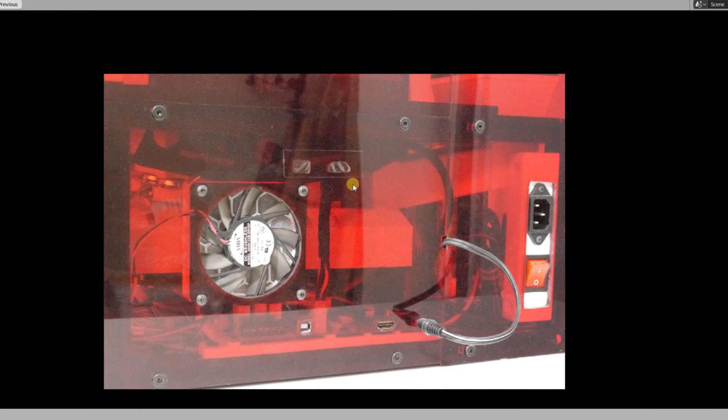It's been a while since we finished part 4, but let's get right into this and not take too long. This part covers the acrylic case, the fans, filter boxes, and ducting for the fans. Nothing too complicated at this point.

Your printer is pretty much already built, so all we've got to do is get the ducting assembled, the fans hooked up and mounted to the correct places on the case, and the case mounted on the outside of the frame. Then you're pretty much done and can print from there.

Looking forward to part 6 where we'll actually be doing the printing. We'll show you the actual printing process in a time lapse, how to use the software I'm using, all that stuff. That'll be the most exciting part, but let's jump right into this.

This is a view of the right side of the printer. I don't have any drawing files or CAD files to show exactly where to place the fans. For the diameter, you'll just measure from the fan itself. I don't remember what it is in millimeters, but these are 80 millimeter fans. The actual placement here is not super important.

Down here I have all the electronics and chipboard on the bottom. The actual position of this fan and the filter can be moved around a little bit as long as you don't hit the electronics. You can go up, forward, or back, so the placement is up to you.

The one thing you want to make sure of, when drilling the holes for these Allen bolts for every part of the case, is to do all the drilling and cutting you can with the paper still on. When you get the acrylic it has paper on it, so make sure you drill these holes and everything with the paper still attached, because as soon as you take the paper off you start scratching up the acrylic.

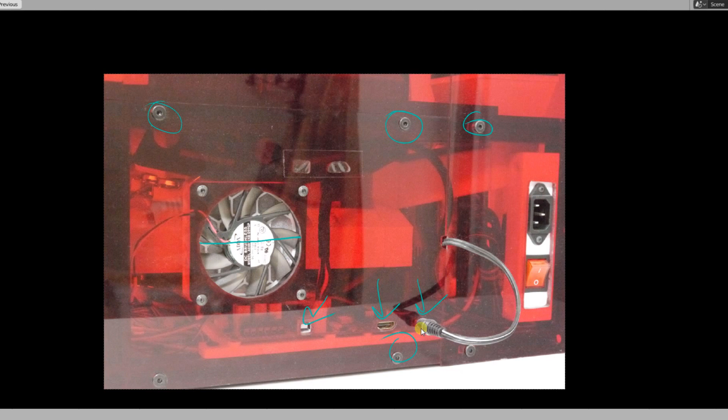Obviously these guys here where the plugs are, I had to do after removing the paper because you need to be able to see where they are. I put it on the side of the printer and used a Sharpie to mark exactly where these plugs were going to be, so I could get the Dremel out and put them in the right spot. But everything else I did with the paper on, so you don't damage the acrylic.

The other note for these bolt holes is to step them up: use a pilot drill bit, an intermediate bit, and then your last bit slightly oversized. If you drill exactly to the 5mm equivalent, there won't be enough play to get this to mount on the printer. There needs to be a little play between the hole and the bolt so you can get these things to mount.

Give yourself a little room and use a couple of drill bits to get up to the size you need, because if you start with your end diameter right away, you're going to end up chipping the acrylic and cracking it, and you'll have to buy another piece. So that's the basics right there.

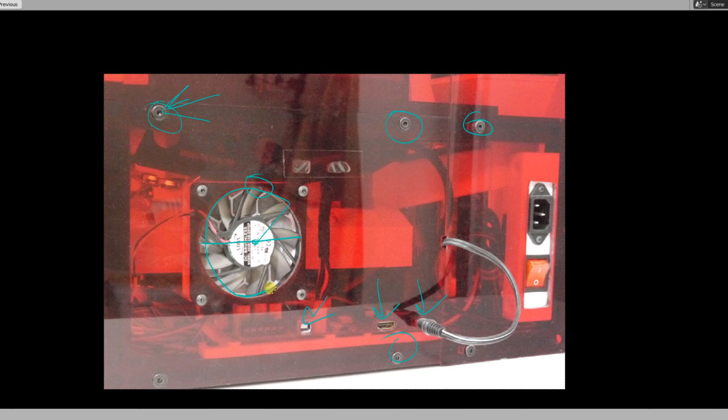On Thingiverse you can see there's a little dip where I cut this out. There's a circle guide attachment you can print for a Dremel that lets you put a center point here, and as you cut it acts like a compass, cutting a perfect circle. You might want to use that for a more perfect circle cut out. Or if you have access to a CNC, you could do all of this with a CNC machine. If you want to contribute CNC files, I'd be glad to upload them to the Thingiverse group page.

So let's go on here to the next photo.

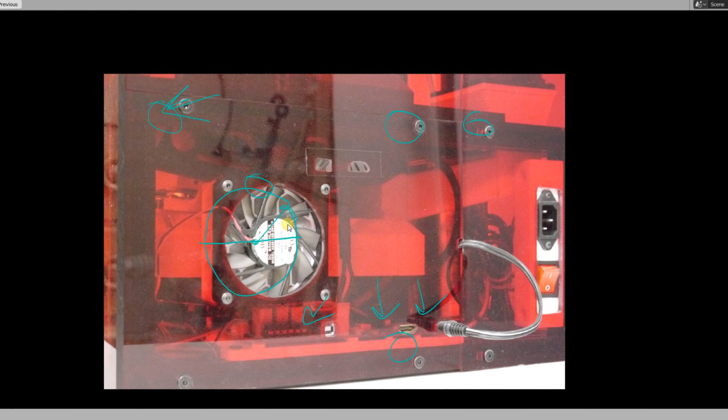This is kind of a top-down view looking in the side. This is just a close-up of the plugs. You can see I cut them pretty close.

In the case where a plug like this has sharp corners, I just used a miniature file set to get these squared up, so you don't have to do anything too fancy. Just get it as close as you can and then file out the corners into the shape you need with a hand file. There's really not much to it.

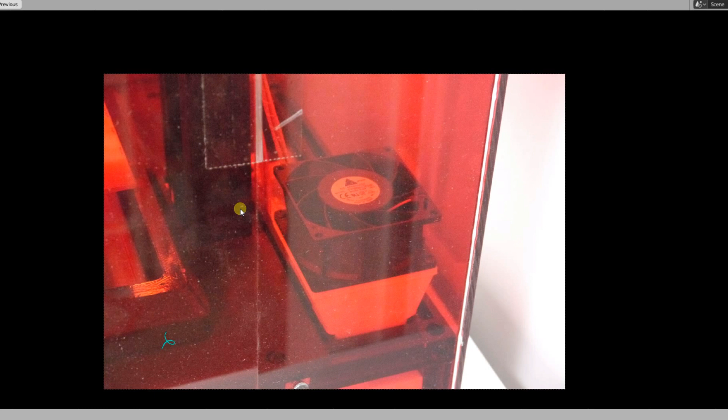On the back here you can see where we attached the back piece of acrylic. I used a product called Fuse It. It's basically like a glue and a sealer, so that way I don't get fumes escaping out of the back here, and it makes the whole printer a little more stable because the back actually holds these sides in place.

The sides are bolted to the frame, but there's no frame at the top of the printer, so up here out of the view there's nothing holding this except the back. So this needs to be glued to the back semi-permanently in order for the case to have some rigidity.

Let's just get here to the next photo that's important at the moment. This is the top of the printer over here. This is the bottom, so we're looking at it sideways. But I just want to show you guys for the seams, the doors and whatnot.

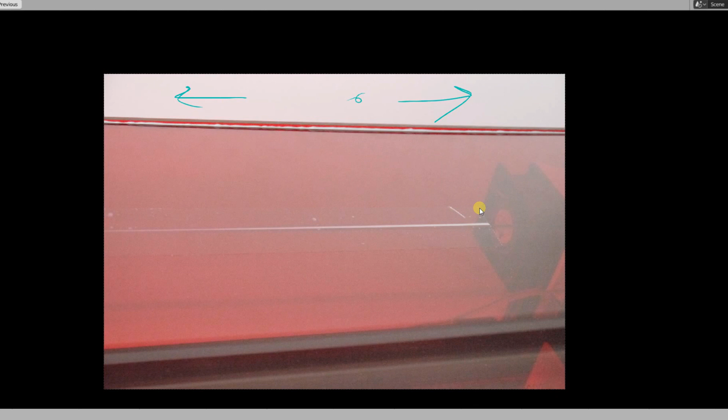All you're going to use is clear tape. This is just a piece of clear 3M tape you would use for a box. Better quality tape obviously would be a good idea because it'll last longer, but there's no fancy hinges on the printer. This keeps it minimalist and clean.

So all you need to do on the wings, this is one of the wings here, the doors that swing open that I showed in part 1, is just use clear tape. And if the tape ever breaks, then all you gotta do is remove it, rub it down with alcohol to get the glue off, and put another piece on. It's pretty simple, and I've been using the printer for a year now, and the tape has not broken yet, so it seems to be working well.

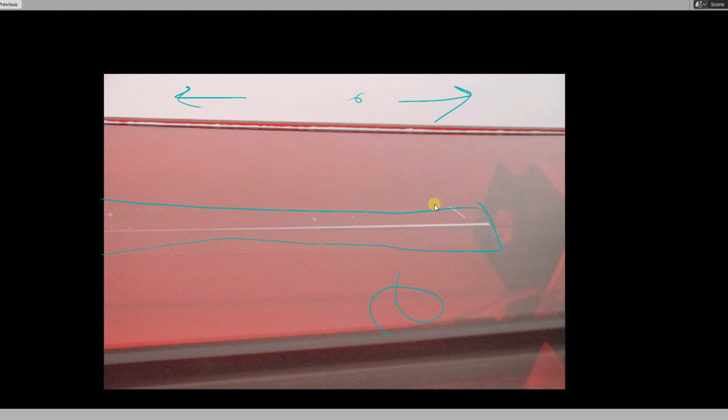Thing I want to show you is the latches. I never showed how to mount the latches exactly, so basically they're pretty simple. You just print them. Let me go to a different photo here so we can show you the little magnets.

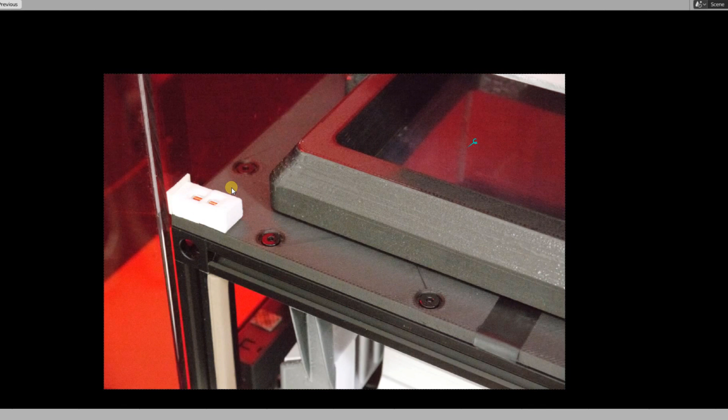These are 1/4-inch neodymium magnets. I think I purchased them on Amazon, these guys right here. And they're the shape of a cylinder, so you just press them down into the recess that's in the print, and that's it.

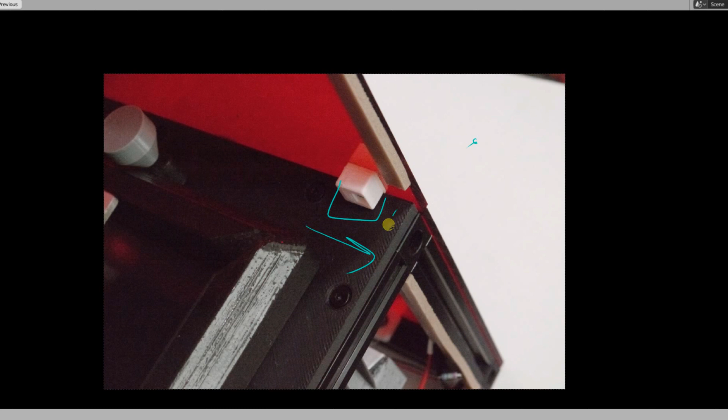But this is the front of the printer here. So we just mounted it on the side of the wing, and I could have mounted it right here on the platform, but the problem is when you start disassembling the printer, this platform comes out first. So that means that if you want to close up the case and keep the dust out while you're working on it, you can't because the doors won't stay shut anymore.

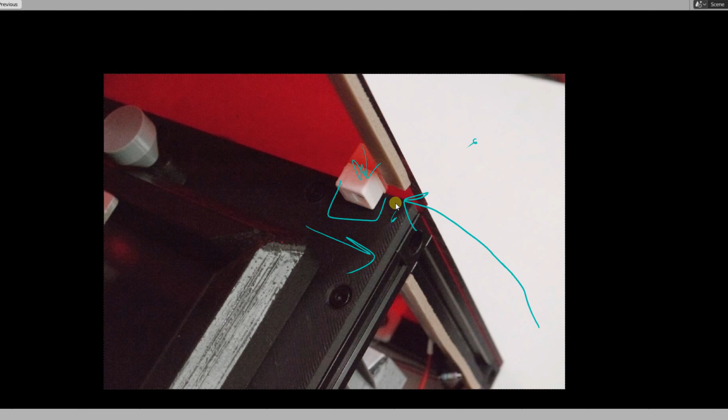So I purposely mounted it on the wing. That way when the front of the case comes around here and closes up into here, everything is still closed and no dust comes into the printer, even if other parts of the printer are missing. Like I could take stuff out of the inside here and it would still close.

This is the other corner of the printer in the front. This one I actually did mount to the platform because having it on a moving door didn't make any sense, and it needs to keep this wing shut pretty much all the time, even when the front is open. So I just mounted this one to the actual platform.

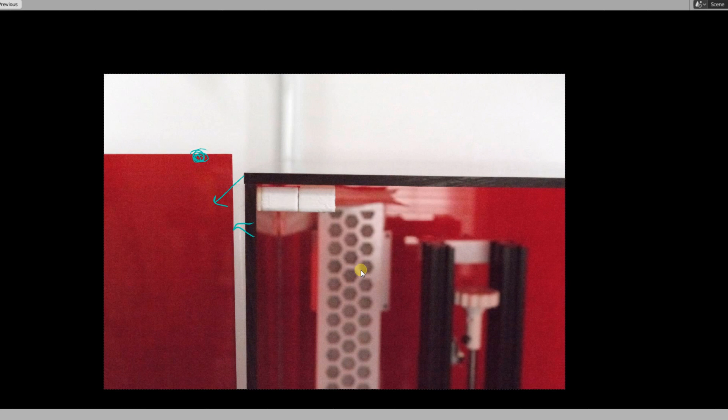This is the top left corner, so if you remember from the first video, this is the filter back here in the top left, and this is just mounted to the top of the case, and this one is just mounted to the side wing.

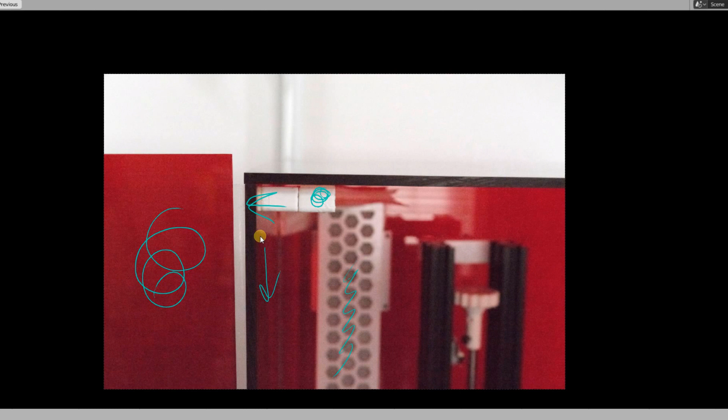The wing has a magnet here at the top, and the one we just looked at was down here at the bottom. That keeps the wing shut, so when you open the door over here, the wing doesn't open on its own. It stays shut unless you physically open it. And this is the top right corner.

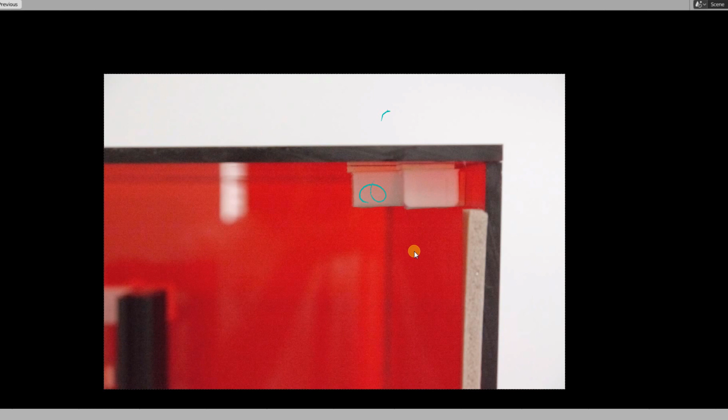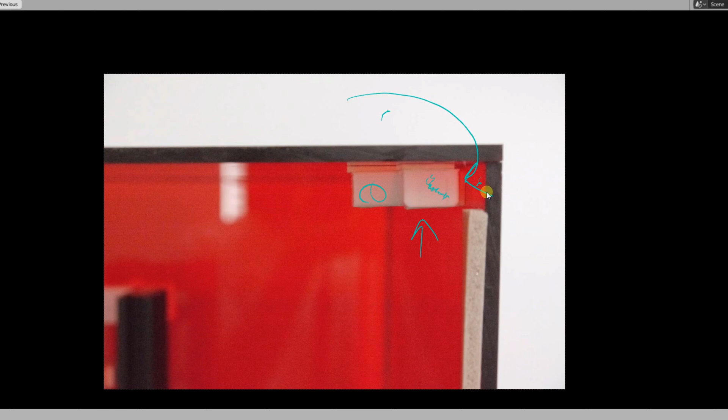That's pretty much it for the case. So you can mark out the case, drill the holes, and place everything where you want to. You do have to put the fans on the correct side of the printer - I'll get into that in a minute - but the exact placement of them is not important.

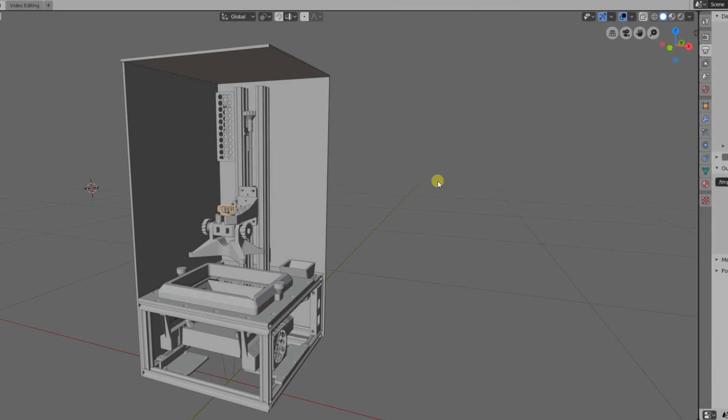This is the digital mock-up I ended up creating in order to do some renders and help show where the different parts were, because it's hard to get pictures of the actual printer without taking it apart, and plus all the wires and everything makes it hard to see exactly what you're looking at.

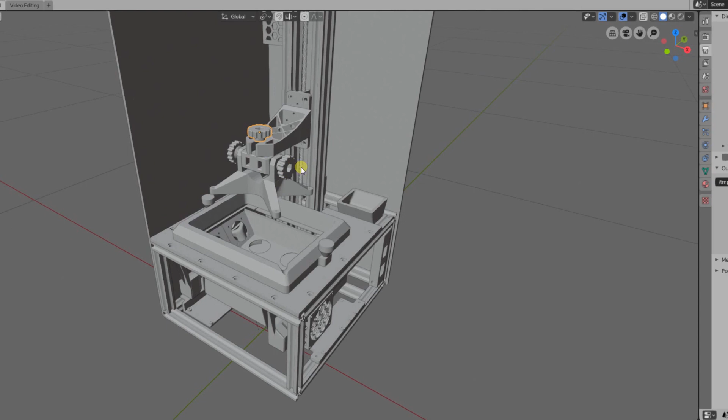I've got the front part of the case hidden here because I didn't model all the parts, I just made simple rectangular shapes for the render. So what I wanted to show you guys was the duct system.

You're going to be attaching this back fan to it. There's a fan here in the corner, which we already looked at. That's the high pressure delta fan that pulls the hot air out of the bottom of the printer and puts it into the top, because otherwise the bottom overheats, which causes problems.

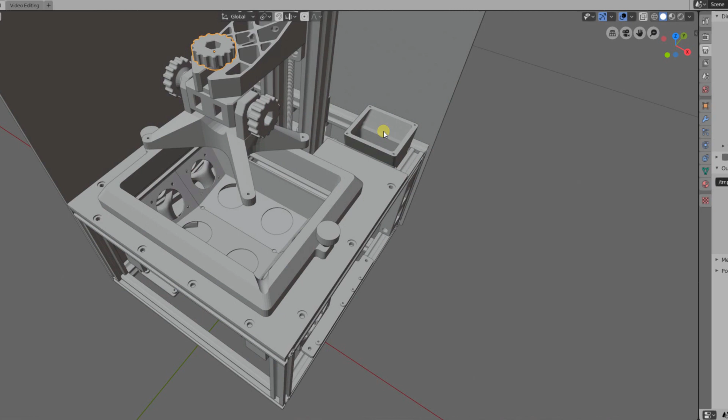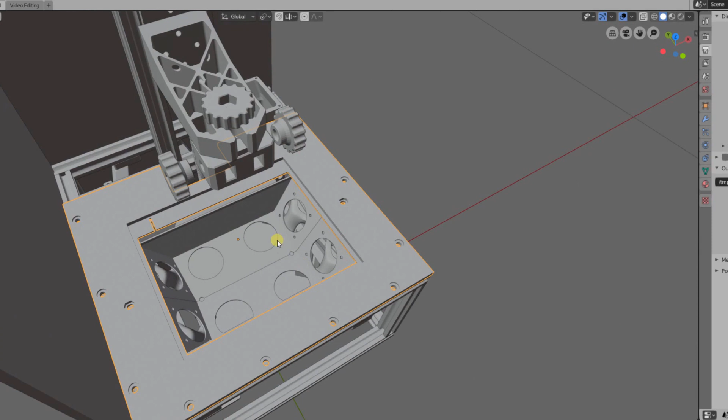I'm going to hide a couple parts here and go down through the different parts to show you, since we have them. These are the knobs, the vat. This is the seal for the vat - I'll hide this so it doesn't get in the way. This is the main platform, and this is the light box down here where the LEDs are going to be sticking up. The lenses will be right here, and these little areas with the holes are where the fans are going to mount.

But the one thing I wanted to go into right now is you have to make sure that your cold air input is coming in from the left here. I'll hide this side as well. This is the little grill that holds the filter material that basically just filters dust - that's all it does.

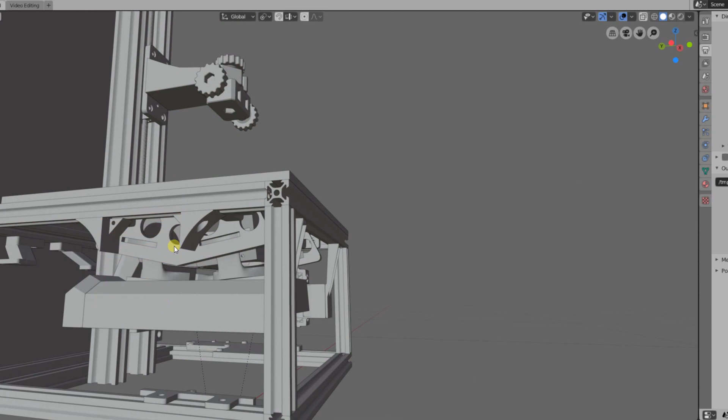So your fan would be right here behind the filter box, and you have your cold air coming in on the left, and you're going to have two fans right here taking that cold air and blowing it up - it's going to go up and across the screen to keep the screen cool.

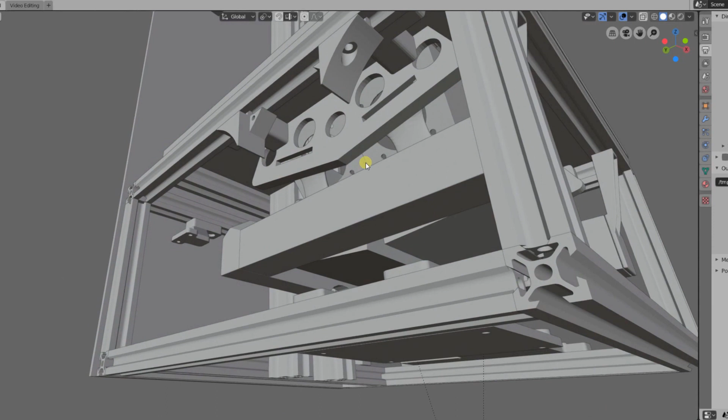That means the hot air has to exit over here on the right side. These fans are going to be pulling air down and out - they're exhausting the hot air out.

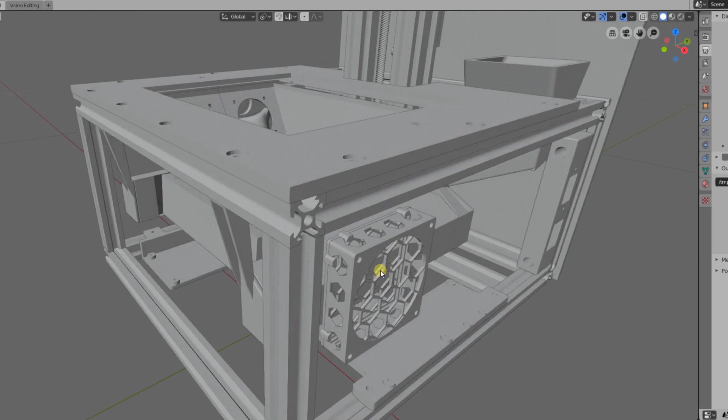And that means you have to have the exhaust fan - this fan right here, this is the filter box - has to be on the right side of the printer, because if it's not, here's what happens.

When the printer is running, you've got cool air coming in, going up, going across the screen and the lights, coming down, and then it just ends up over here in the bottom of the printer, and it heats up this side of the screen, whereas this side over here stays cooler, and you end up with print failures and parts sticking because one side of the screen is too hot compared to the other.

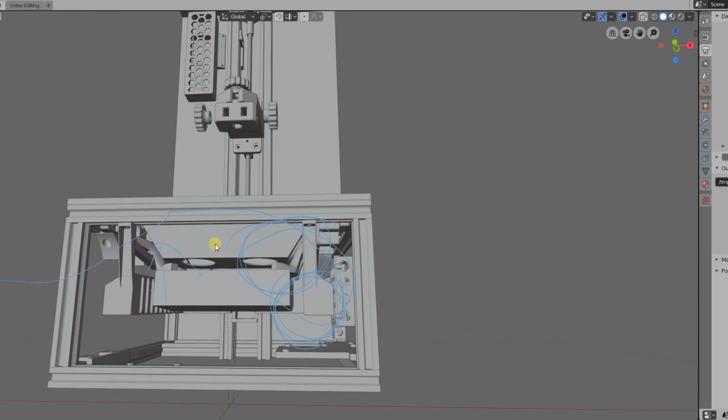So you have to make sure that this exhaust fan is over here on the right side. It can be anywhere on the right side, but it needs to be on the right side. So we'll go ahead and keep going down here.

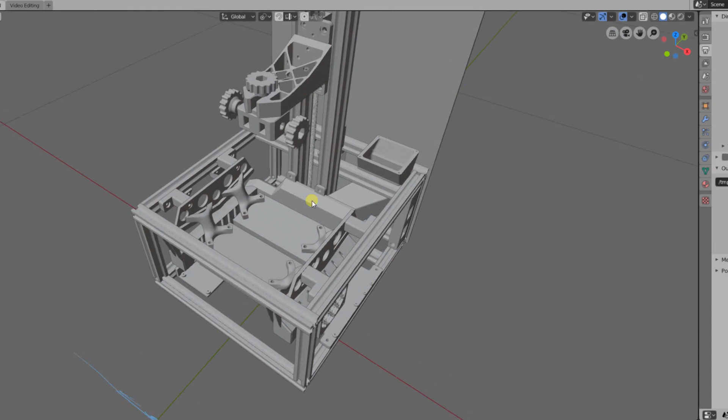Hide this stuff. We'll hide the fan boxes or light boxes here. These would be the actual heat sinks. I'm going to hide these. These are the main brackets that hold the whole assembly. So we'll hide that. This is the rails. We'll hide that, hide the brackets.

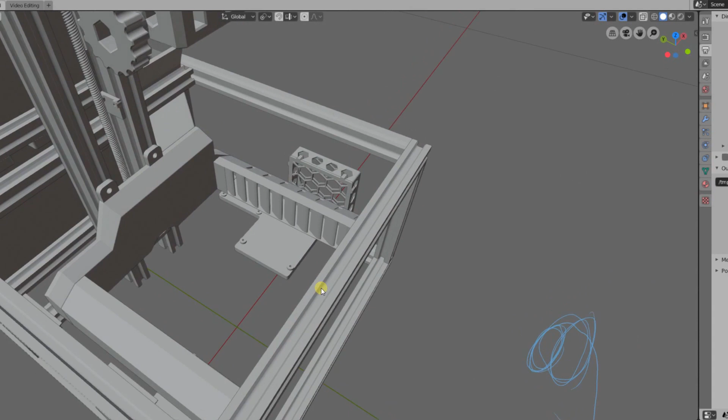And now that we're all the way down in here, I've gotten pretty much everything hidden except the fan brackets and the ducting, because I wanted to show you guys how the ducting is set up. The ducting was new, it wasn't in the original Part 1 video because I didn't realize that we had heat problems at that point. But I realized at some point that the heat underneath the platform was causing the prints to stick abnormally to the FEP film.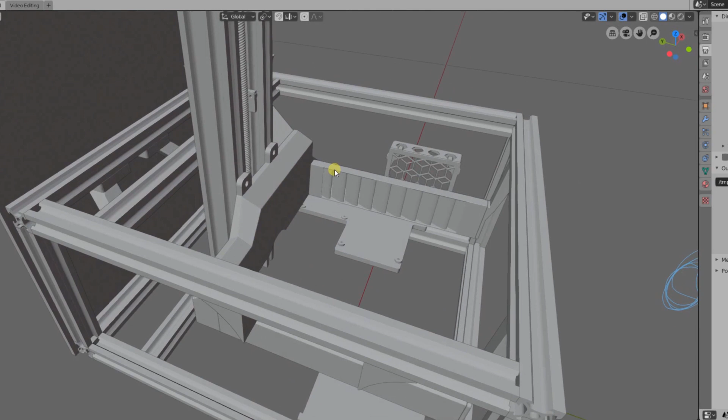Because there's always some vacuum or peel force, they call it, between the part and the film, because there's no oxygen when it goes to peel it off. There's no air between it, so naturally there's a little vacuum pressure.

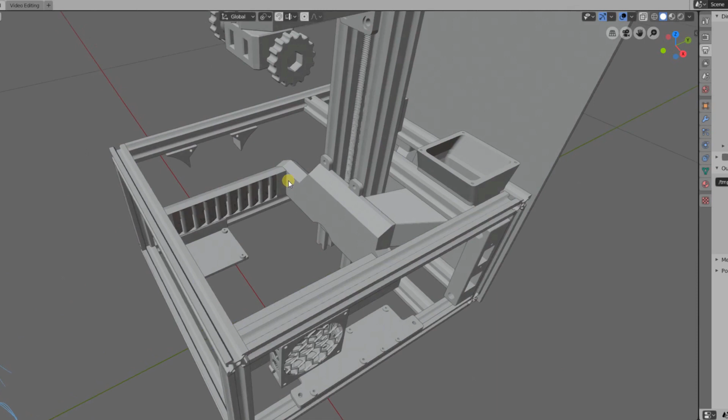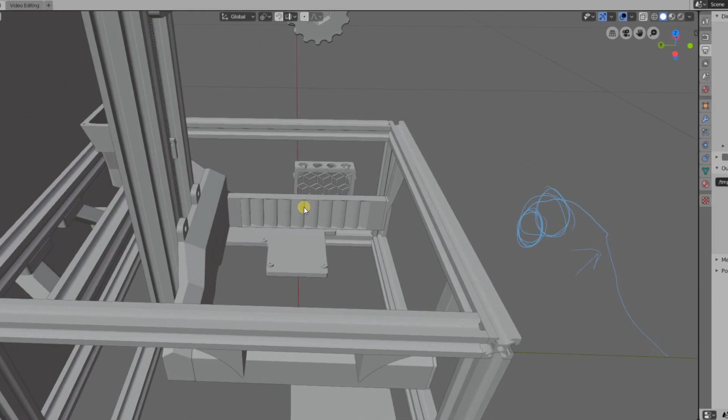But when you have the bottom of the printer getting super hot and the top up here is barely warm, that heat differential causes problems in the form of your parts sticking really, really well, and they stick so well to the FEP film that it will actually tear the prints apart at some point. So after running for about an hour and a half, it'll start ripping your prints in half. And of course, once that happens, you might as well just stop the printer. Your print's over, it's done.

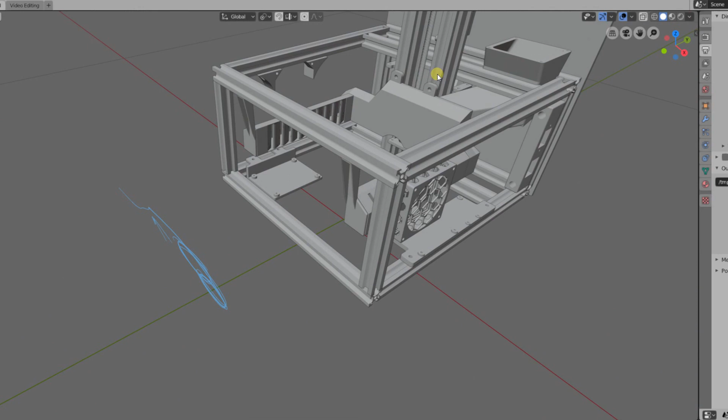So it doesn't matter if you're printing one part or 50, they're all going to be wasted. So that's when I decided to design this duct system to get the hot air out of the bottom and put it up in the top so that the temperature was more equivalent. And it did end up working beautifully. It solves the sticking problem, so now the parts don't rip and tear anymore.

Basically the way this duct works is you have the two side ducts that run down beside the heatsink blocks, and then you would have this main duct in the back.

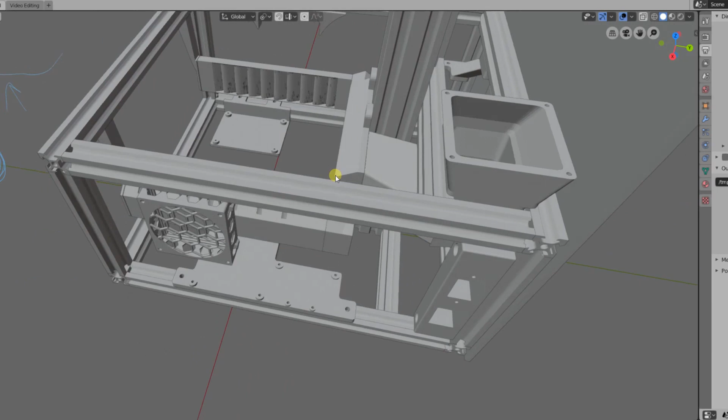And this one is not identical to the print. The print is actually going to come straight off of here. It comes out square, there's no bevel on here. I must have loaded the wrong file into here, but maybe it is the right one, I can't remember now.

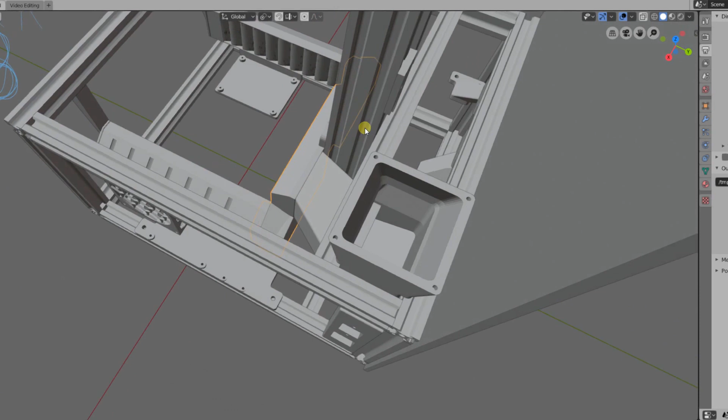But anyway, this is the joiner for the two ducts, and that basically just makes this high pressure fan here pull air from both of them, right? And then down here at the end, these are basically a cap and a bracket at the same time. So if we look upward...

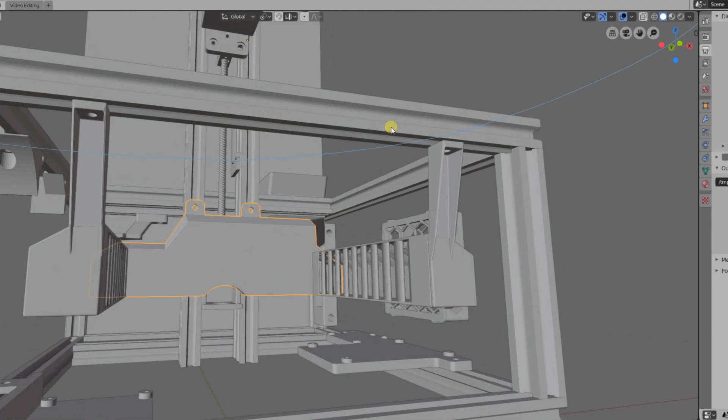These are just mounted to the bottom of the front rail, and it keeps this arm, it keeps the duct arm from dropping down because of gravity or vibration, so it stays there. And it also keeps it from pulling air from the end, because we don't want air coming in the end. We want air to go directly from the heat sinks.

They're going to hit these vanes, and the vanes are going to direct the air backwards, and it's going to go straight back into here, and the combination of the movement back and the vacuum pressure from the top here pulling this direction means that we'll get the hot air out as quick as possible.

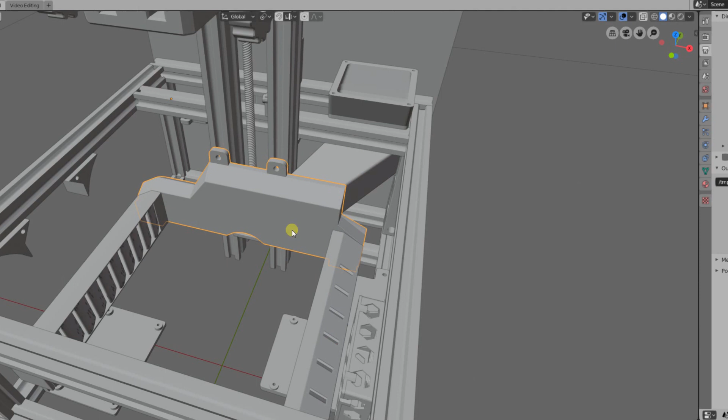These ducts on the left and the right are identical, except for one thing, and that is I put slots in the top of the right side because, remember, this is the hot side of the printer over here. So we need to pull more air from this side of the printer than we do from this side. So I purposely designed this duct to pull in more air, and in the back here I also designed it so that the air has an easier flow up into the fan than the other side.

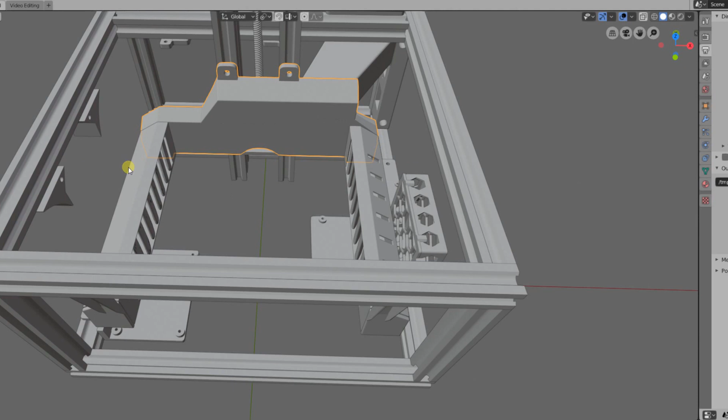So we're actually pulling more air from this side at all times than from this other side. But what that does is ensure that this side doesn't overheat, because this side is getting all the hot air exhausted into it. So actually the temperature on the back of the screen is more equal when we have this side pulling more.

And you cannot skip this fan over here on the right that I showed you earlier. This is the filter box. You can't skip this. I tried to remove it and take it out of the printer completely, but eventually this duct system on the right side cannot pull the air quick enough out of here, and eventually it does get too hot and causes problems.

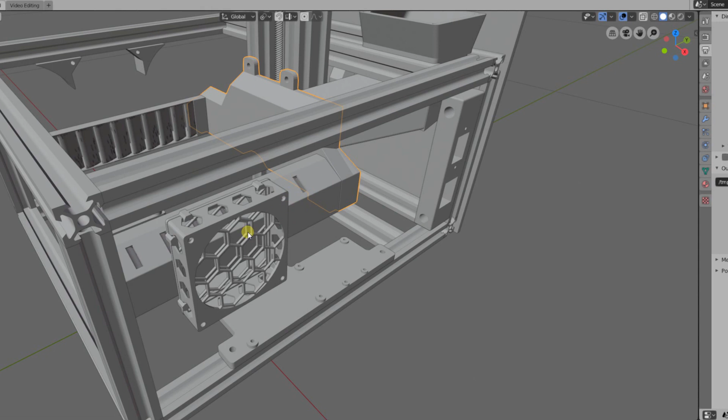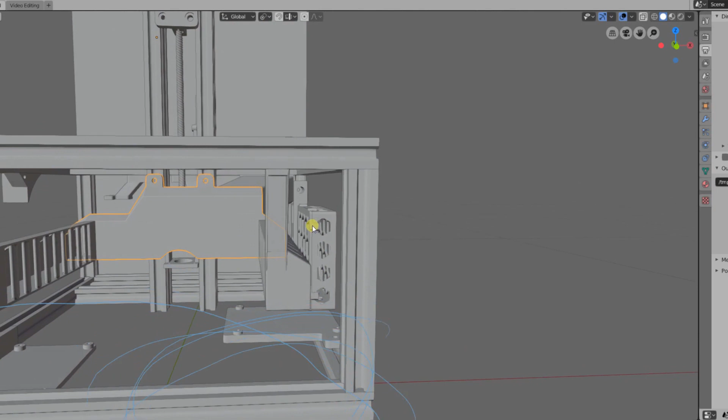So I had to put this fan back in here, and this filter box was originally a large filter box like we had on the top, up here. It looked like this guy over here, but the space is more confined with the ducting, so it wouldn't fit in there anymore, and I had to change it to the smaller filter box. I had to basically redesign a new filter box that also has carbon in it, so it absorbs the fumes. Maybe not as well, but it does absorb them enough to not smell it.

But you can't skip this fan. This fan has to be over here on the right somewhere, or you're going to overheat the right side. So that's pretty much it.

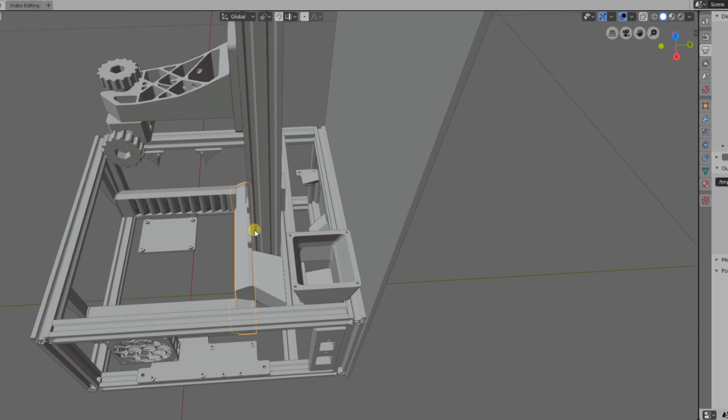These little legs just basically press on. If we hide one of them here, hide the vanes, here we go. It just basically presses onto the back, so you could ignore these. When you press it on, it just slides onto here. It's just basically a press fit. There's no glue or anything.

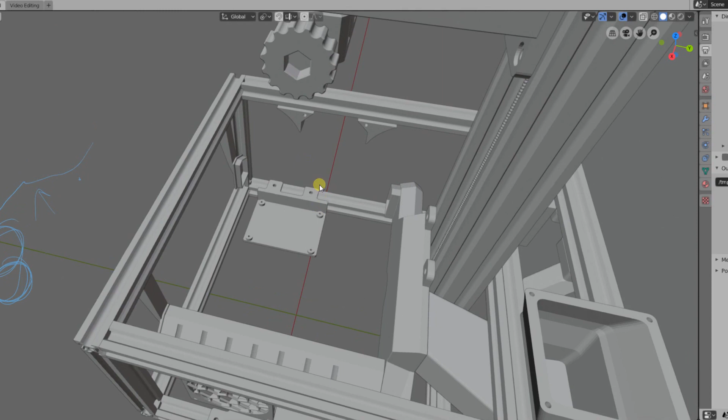If you want to glue it, you could, but I didn't glue mine because I designed both ends here, both the cap and the bracket, to have an inset that holds onto the part, so it can't actually come off. So it is a little bit tricky getting this duct in here, so you may have to remove some of the light parts to get it in there.

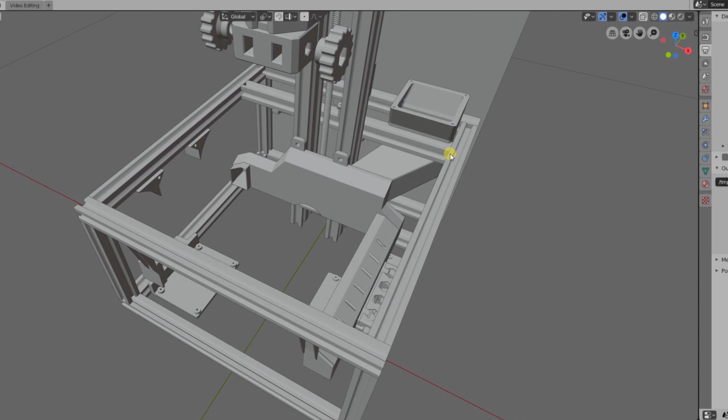But it will greatly improve the printer's thermal setup, and you won't have any print failures. I have had zero print failures caused by heat since I installed it, so your fan's going to bolt on here, and that's pretty much it. Don't want to take too long here.

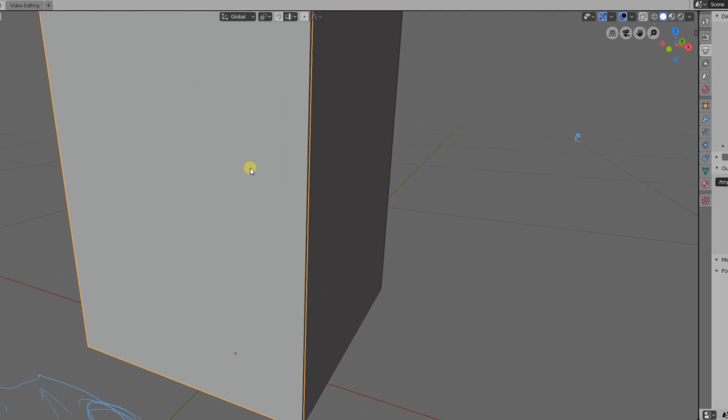Go ahead and unhide all this other stuff. So at this point, you guys should have the ducting installed, you should have the fans mounted. We're going to go back, look at the photos again. Trying to show you one of these photos.

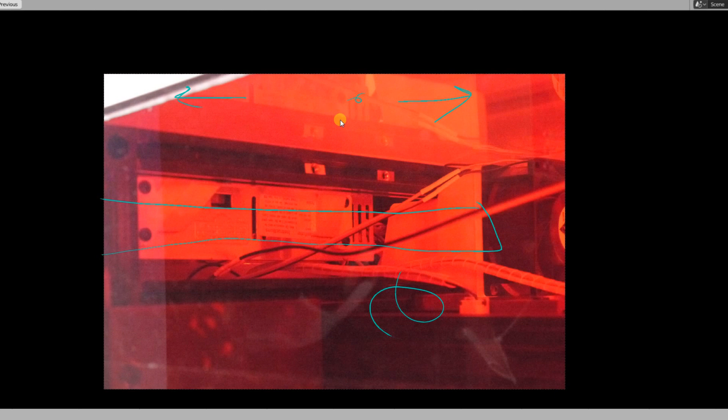Right here, this is the back of the printer. So this is the back, here's the fan. There's the fan over here. This is the power supply right here, and you can see the bottom just barely misses the power supply and the cables coming out of it.

And this is not attached, it's just sitting in here. I think I placed double-sided foam underneath it so the vibration wouldn't carry into the case, because no matter how well balanced this fan is, there's always some harmonic vibration, and I didn't want it going into the frame. So I just put a little double-sided tape under it, basically a piece of foam, so that it couldn't vibrate and go into the frame, but that's it.

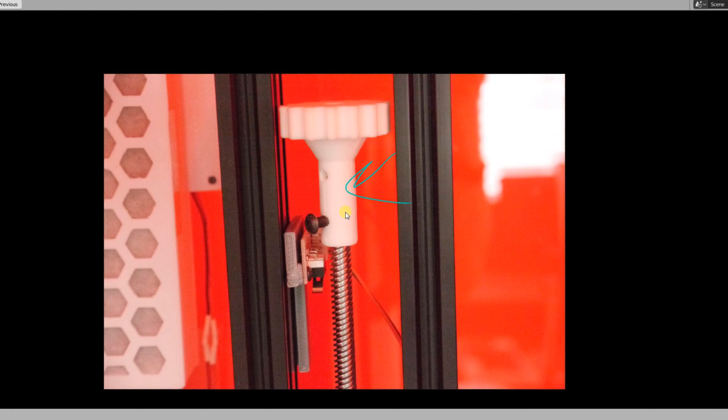I wanted to show you one last thing here. The platform - I did want to note that I changed the platform from the mesh back to the anodized aluminum, and that's because once I got the entire printer rebuilt and had the acrylic window underneath the screen - remember I showed you guys, you put an acrylic window under the screen here to keep it flat when it's printing so there's no drooping, it can't sag down.

Once you do that, the parts actually adhere really well to the platform, and in some cases they adhere so well that you end up breaking them to get them off, so I ended up switching back to the anodized platform, and I did drill these holes. I think the holes are spaced at 20 millimeters, 20 or 25, but I hand drilled all these holes carefully after drawing out a grid and using a center punch.

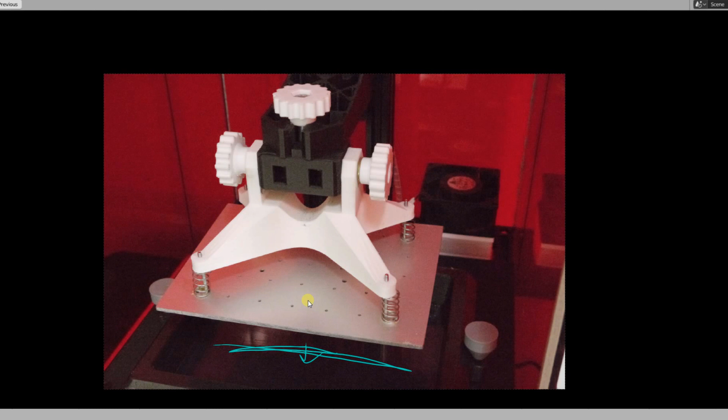So far this anodized aluminum plate seems to be working better because the prints are easier to remove, but they still stick just fine. Just wanted to note that.

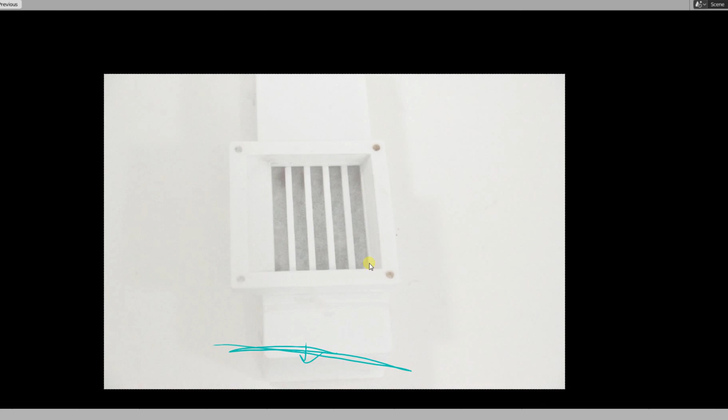This is looking in the side. You can see these little ducts on the top. And the one last thing I have to show you guys is how to assemble the filter boxes.

It's not too complicated. Basically, you're going to print the adapter, which is this guy here, and it has a lip on it, and that lip mounts into the back of the filter box. So when you're looking at the filter box from the back, this recess right here is the opposite of that lip, so it actually presses in and clips in.

It's made to fit fairly snug so it doesn't fall off. I didn't glue it, I just pressed it on and it stays there. That's basically so you can remove the filter box. So if you ever want to take the filter box off to change out the filter media, you can leave the fan mounted.

When you're assembling the filter box, you press this into the back and it'll look something like this. Then you're going to drop these little rails you see right here, these little bars. This is a spacer, and the spacer just keeps this filter media right here spaced off the back.

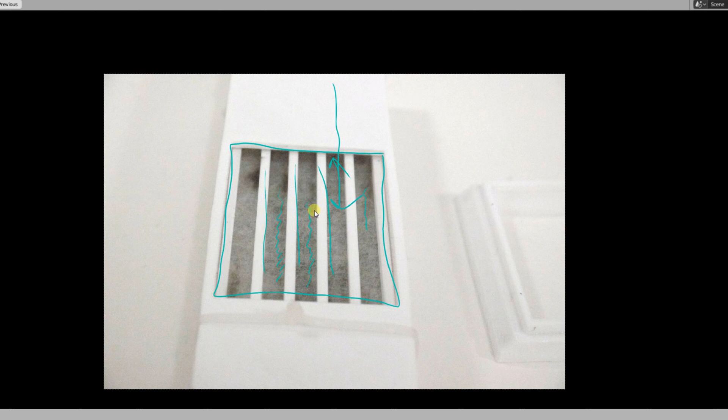So air can come down the back of the filter box like this and end up in the fan. Otherwise, there's no direct path for the fan to pull air from over here. So make sure and drop this little spacer into the bottom first. And then from the top, you're going to have something like this.

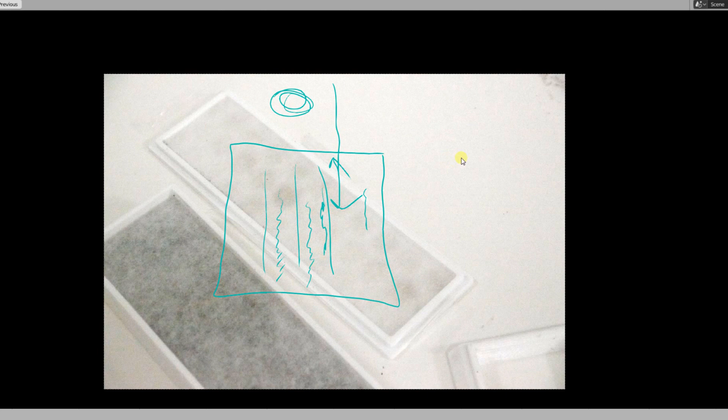You're going to have a piece of filter on the top here. I put another one in here because there was a little bit too much slop. There's going to be one on the bottom, obviously, which we just looked at. There's one right here, and then you're just going to basically fill it up.

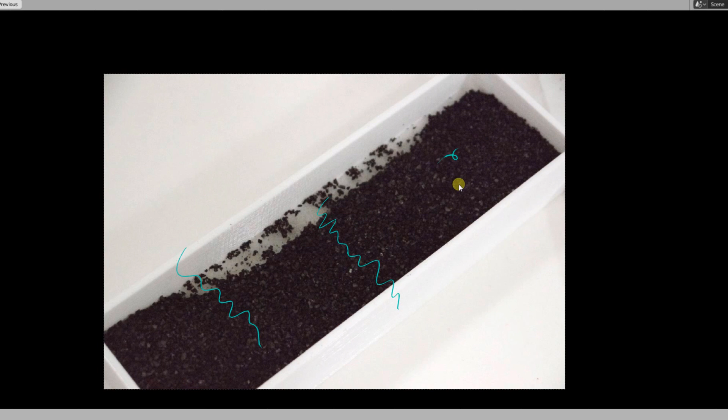You're going to take the little 3M filter cartridges and snip the face off carefully with a pair of pliers. Then you're just going to pour the activated charcoal in here, and this is what's going to absorb all the print odors so you don't shorten your lifespan any. Then you're good to go.

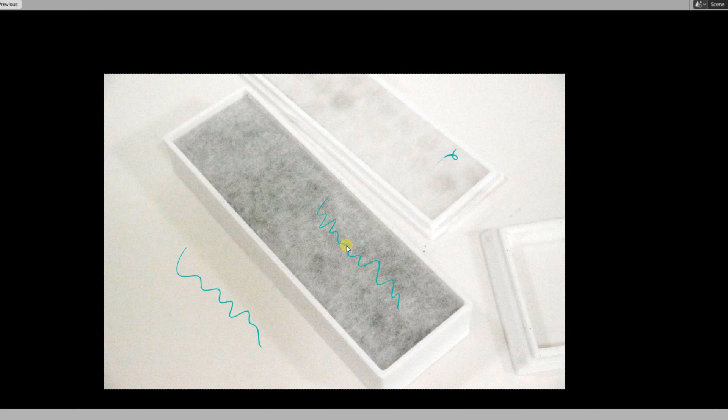You're going to put it back together, and it will look like this over here. So that's pretty much it for the large filter box. The small box is kind of the same idea.

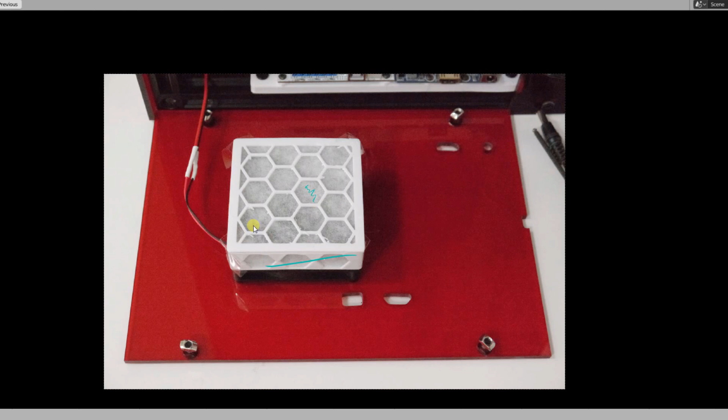You're just going to put this filter media in the bottom, put a piece on each side. Make sure that they're just a little bit too large so there's no gaps, because if there are gaps, that charcoal will sneak out and end up everywhere. Then you're going to have a piece on the top here, on the lid. You're going to put the charcoal in there, pop the top on, and you're good to go.

So that's pretty much it, guys, for part 5. Looking forward to doing part 6, where we're going to go into the printing process. That's where it gets to be more fun, because you get to prepare your models, support them, hollow them out, put drain holes in them, slice them. Then the best part comes, the printing part. And when you take them off the platform, you got to clean them up and all that stuff, and then you got your beautiful prints. Looking forward to part 6. Hopefully you guys are as well. See you in the next part.